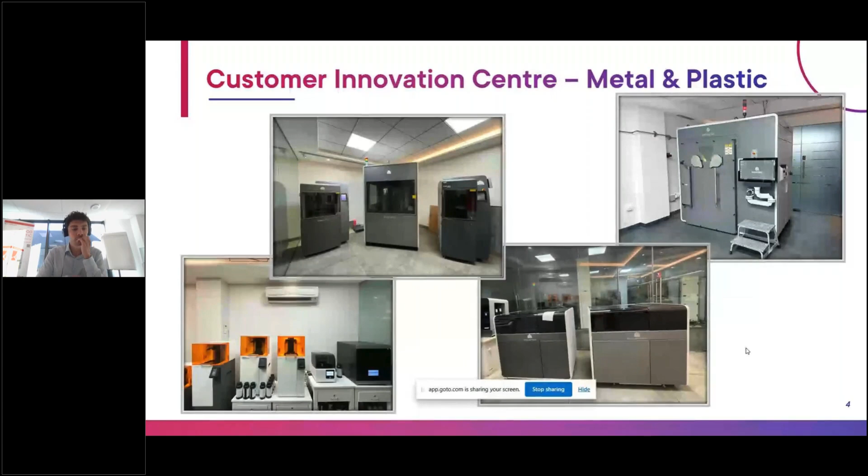So where we are today: we have installed more than 650 printers in India. We have 95 employees, dedicatedly 40 employees for application service as well. We have pan-India presence, with regional offices in Bangalore and Delhi. In Mumbai, we have our head office. Additionally, we have a customer innovation center for metal and plastics. These are some images where you can see all the material, all the machines under one roof.

Shree Rapid Technology is a digital manufacturing solution provider. For that, we deal with reverse engineering, and we tie up with GOM scanners. For reverse engineering software, we partner with 3D Systems, Materialise, and Oqton. For making metal powder, we partner with AMT. For 3D printing, we partner with 3D Ceram, 3D Systems, BMF, Rise 3D, and Nanofabrica. For inspection software, we partner with GOM.

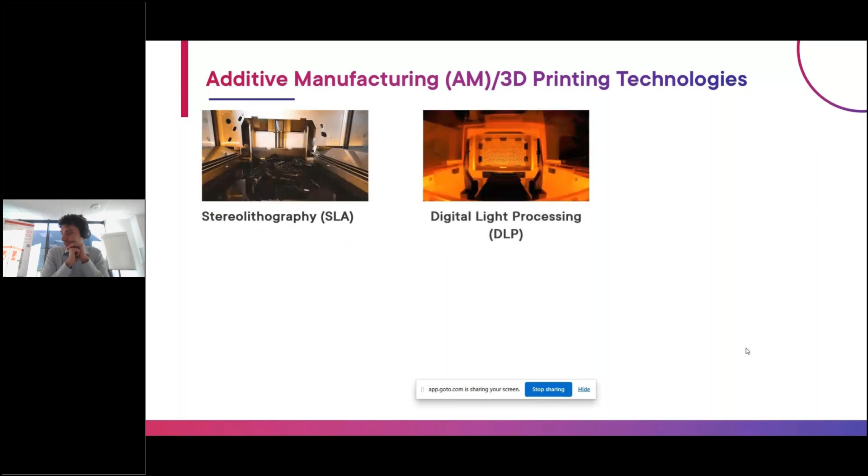Finally, we have dimensional post-processing techniques. So as a company, we have all the technology from right desktop to production level, like SLA technology, DLP technology, SLS technology, multi-jet printing, SAF based technology, and direct metal printing.

So what we're going to talk about today is something really passionate, in 3D printing. The company is called 3D Ceram, from Limoges, France. They have very rich experience in technical ceramics, and we have been following them for the last 6 years to propagate their technology and push adoption of additive manufacturing, especially in technical ceramics, across the country and industries.

So, thank you for our partnership with 3D Ceram. Thanks, Max. Please reach out to us for any queries to validate your technical queries in technical ceramics, or for any demonstration. Thank you so much.

So thanks again for the kind introduction. Very good morning to all the attendees of the webinar. During the next few minutes, I would like to give you a clearer understanding regarding our technology and full end-to-end solution for ceramic 3D printing.

First of all, let me explain the history of the company in order to set the context. The first cycle of the company started in 2001, and it was R&D. 3D Ceram is a spin-off of a technical center, and our co-CEO was head of this technical center.

We started to print and sell ceramic parts. It was our first business model. Then Richard Gaignon joined the company in 2009, and in 2015, nine years ago, we decided to change the business model in order to sell complete lines: machines, printers, consumables, and know-how to allow our customers to print parts in their own facility.

In 2017, the main shareholder became Sinto. Sinto is a Japanese group with revenue of more than $1 billion and more than 4,800 employees all around the world, and it gives stability to 3D Ceram. Since 2017, we've developed a range of machines, printers, and software that I will explain.

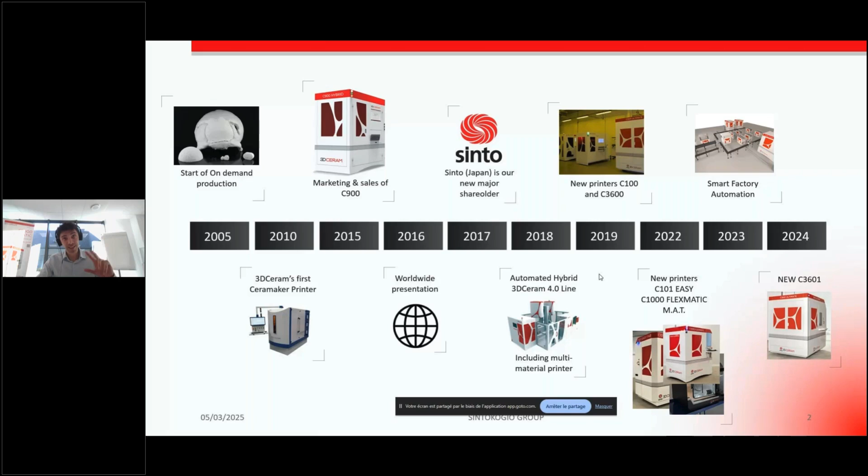To compile, we have more than 22 years of experience in ceramic additive manufacturing, and one of the strengths of 3D Ceram is that we started to print and sell ceramic parts ourselves—that was our first business model. A few numbers: we sold the first machine in December 2015, and we now have more than 140 printing lines around the world. Our headquarters is based in Limoges, a French city well known for ceramic in Europe, and 3D Ceram represents 60 people globally.

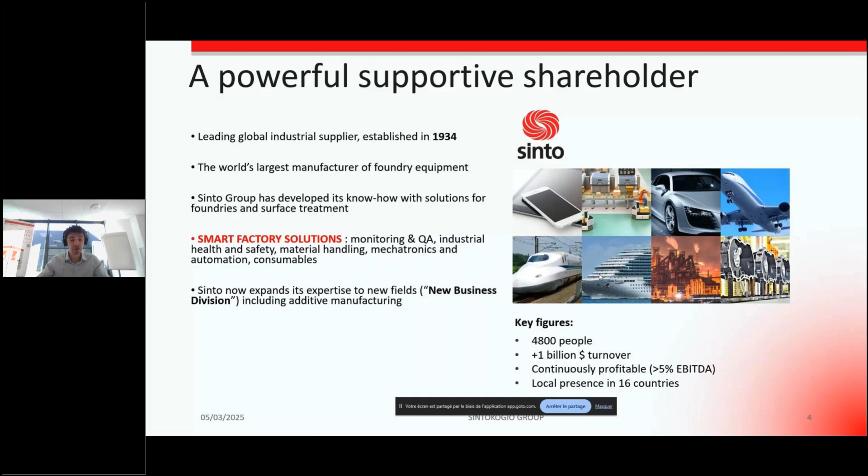As I told you, Sinto is the main shareholder since 2017. Sinto represents approximately 5,000 people, more than $1 billion in turnover, and Sinto is a very profitable company. The main and historical business of Sinto is not ceramic 3D printing—Sinto is a leader in foundry equipment and surface treatment. But Sinto decided to invest in 3D Ceram because they identified ceramic additive manufacturing as a growing business.

So, coming back to 3D Ceram and our business model: we are what I'm calling a process provider. What does that mean? It means we can assist our customer at each step of the process. We develop machines and printers that can be incorporated into semi-automatic printing lines, as well as software dedicated to ceramic 3D printing, always with the objective of increasing productivity and decreasing production costs.

The material, the consumable—I'll show you some video after—is a mix of ceramic powder and photosensitive organic content. And what we call services is technology transfer, which is very important for us. Technology transfer means training and assistance to allow our users to print a lot of good parts as quickly as possible.

A few words about the main process of 3D Ceram: SLA, stereolithography. The two first steps of the process are common to any additive manufacturing process. First, we have to create the CAD file of the part we want to print. Then the user has to generate the printing platform—meaning how many parts on the platform, printing orientation, and so on. Then the SLA machine, the printer, will print the ceramic parts layer by layer from the bottom to the top thanks to the slurry.

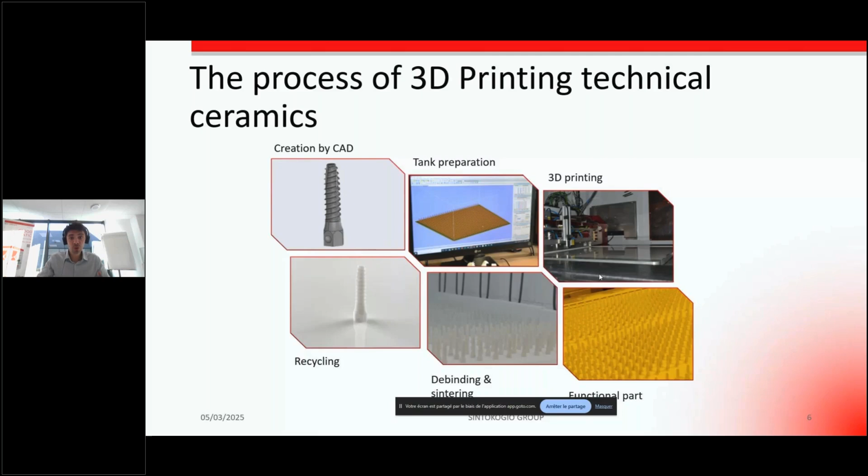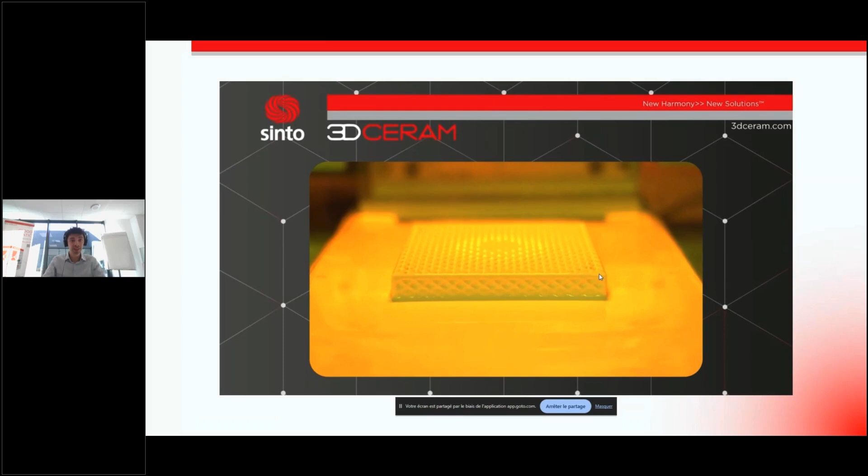Let me show you a quick video of the process. As I told you, the SLA stereolithography process uses a slurry, a mix of ceramic powder and photosensitive organic contents. The slurry can be high viscosity or low viscosity, depending really on the customer's need.

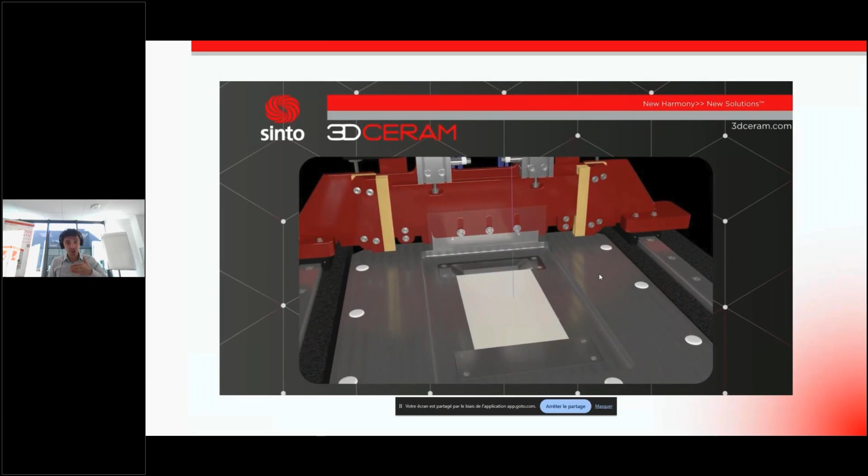This slurry will be printed by the SLA printer. The blade, the recoater system—exactly what you can see on the screen—will spread a thin layer of slurry on the printing platform, and the UV laser, based on the top of the machine, will cure the area to print.

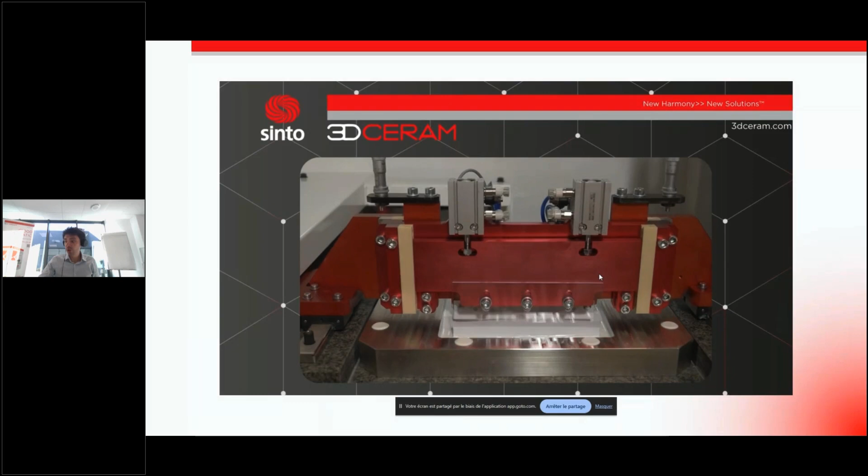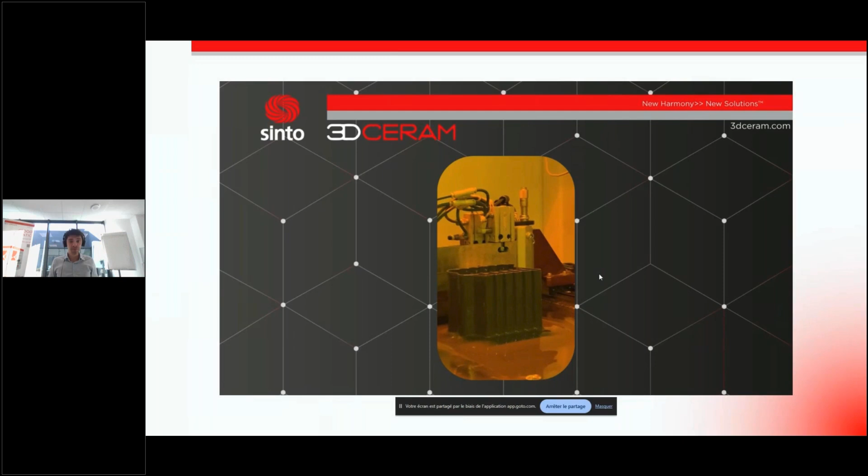After printing a layer, the printing platform will go down by a layer thickness, and the blade will spread another layer of slurry, and so on. When the printing of the part is over, we remove the printing platform from the machine.

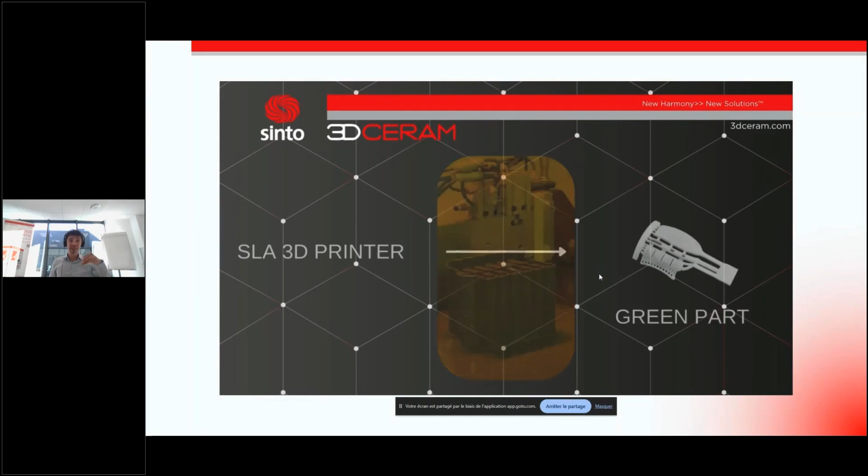We save the uncured slurry, the uncured material, which can be reused for the next printing run. At this stage, after printing and cleaning, we have what we call a green part, a mix of ceramic powder and cured photosensitive contents. So we have to do thermal treatments, debinding and sintering, to obtain a fully dense ceramic part.

So SLA is what we call a top-down process. Some strengths of the top-down process: we don't have any physical links between the part and the support, or between the part and the printing platform. Maybe some of you already know the DLP process - with SLA top-down, we don't have links between the part and the support. Also, top-down allows no limitation for the size of the printing platform.

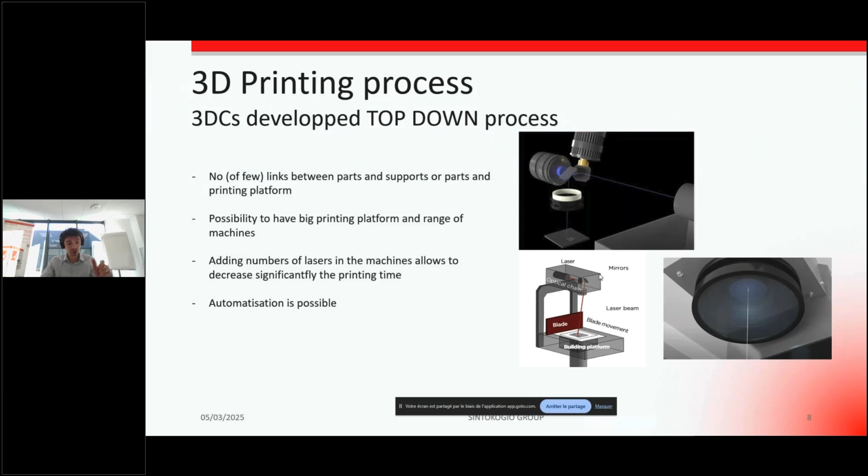And then we can have a range of machines that I will show you later on. On top of that, when we increase the size of the printing platform, we also increase the number of UV lasers in order to decrease the printing time. Definitively, top-down is the right process for mass production and to reach target part production, as we can have a big printing platform with automatization of the process.

As we're speaking about the machine, let me explain more in detail our range of printers. Thanks to SLA and the top-down process, we can offer a wide range of machines with the same process and the same slurry, to allow quick and easy scale-up for our customers.

We have the small one, the C101 Easy, with one UV laser inside, and a printing platform of 100 by 100 by 150 mm. We have the medium size machine, the C1000 Flexmatic, with a printing platform of 320 by 320 by 200 mm, and this machine can have 1, 2, or even 3 UV lasers in order to decrease the printing time.

And we have the bigger one for mass production or printing of big ceramic parts, the C3601 Ultimate, with a printing platform of 600 mm square by 300 mm for the Z-axis, and 4 UV lasers inside.

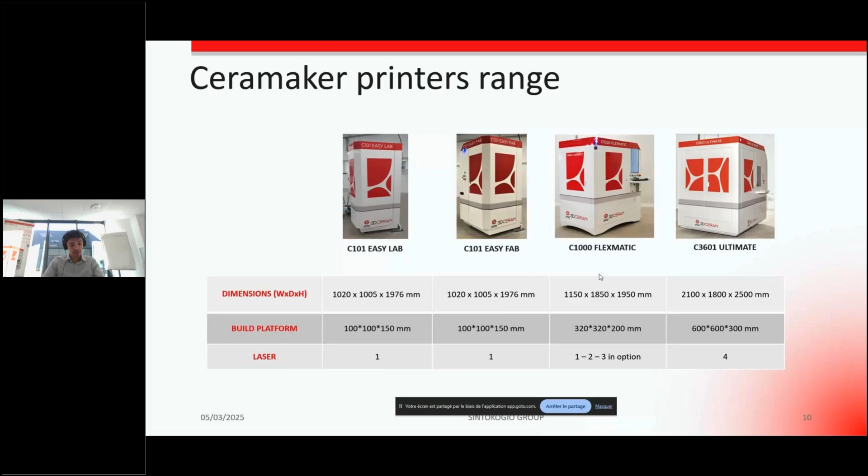Thanks to the range of machines and the big printing platform, our users can print big parts or lots of parts. Regarding lots of parts and mass production, additive manufacturing cannot yet compete with CIM, ceramic injection molding, for instance. But for series of thousands or tens of thousands of parts, 3D printing and SLA can compete.

For instance, if we look at the small alumina nozzle on this slide, this part is used in production for semiconductor applications. The size of the part is roughly 5 cm by 5 cm. We can print 4 parts on the small machine, with a printing time of 20 minutes per part. If you print the same part on the bigger machine, you can print more than 100 parts on the platform, and in this case the printing time per part is approximately 6 minutes per piece.

So once again, when we increase the size of the printing platform, we also increase the number of UV lasers inside, in order to decrease the printing time per part.

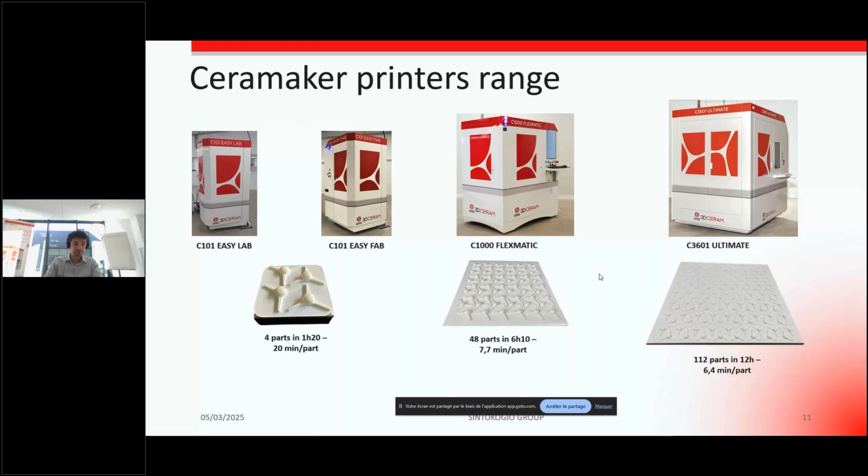Let me say a few words about the consumables - the mixture of ceramic powder and photosensitive organic contents. Our users have 3 options. First option, they can print the standard mixes developed and produced by us. Second option, we have an on-demand offer.

On-demand means that we have in our facility a team of chemistry and ceramic engineers in order to develop a new formulation with powder coming from the customer. So if you have your own ceramic powder and want to use 3D printing and SLA, we can develop an on-demand slurry for you.

And then the last option, very important mainly for laboratories, universities and research centers: keep in mind that all the machines are open systems. This means that any user or customer can develop by themselves their own formulation and their own printing parameters as well.

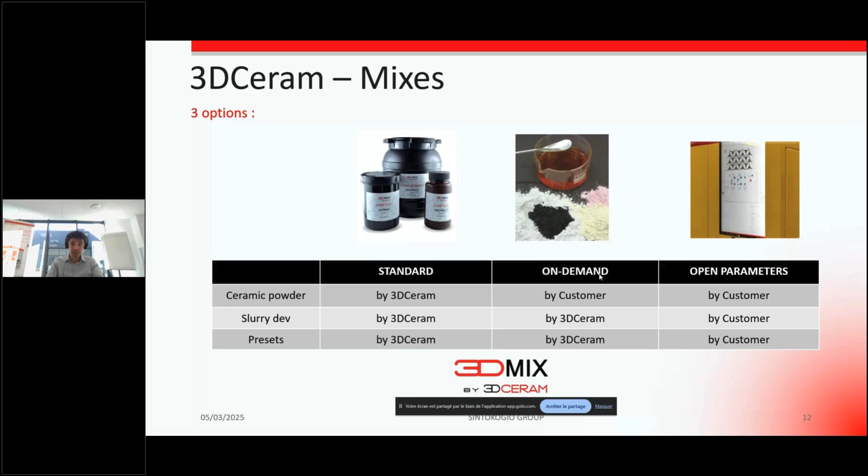About the standard mixes developed by us, just for your information, we developed more than 15 material mixes possible to print with our SLA printers. Mainly oxides, such as alumina, zirconia, HAP and TCP - hydroxyapatite and tricalcium phosphate for implants, cordierite for space applications, and others. We also developed some slurries for nitrides, such as silicon nitride and aluminum nitride, mainly used for defense and space applications as well.

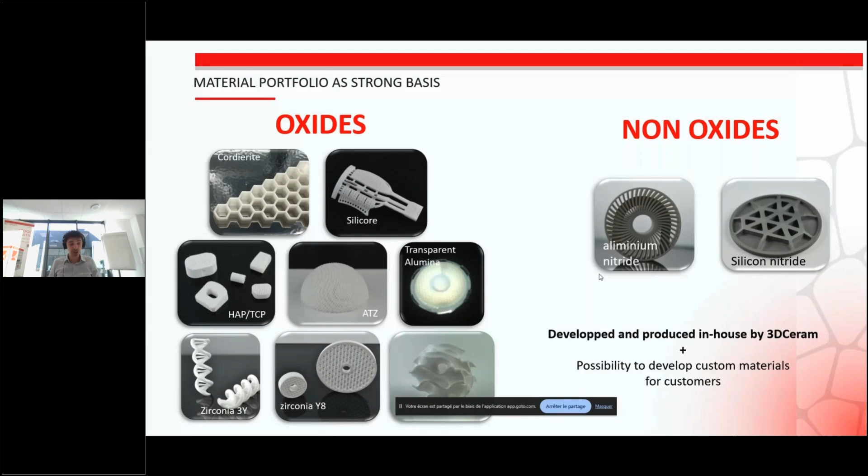But as I told you, all of our machines are open. So I want also to share with you some examples of material slurry developed not by 3DCeram, but developed by some of our customers using our machine. I have some customers, for instance, who developed formulations for spinel. Spinel is a transparent ceramic which can be used for luxury or defense applications. Alumina with short silicon carbide fibers, SiC, PZT, which is piezo, and ferrite.

So as you can see, ceramic is very broad. You have a lot of printable ceramics. We develop internally at 3DCeram the main printable ceramics, but as the machines are open, if you want to develop your own formulation, you can also develop your own slurry.

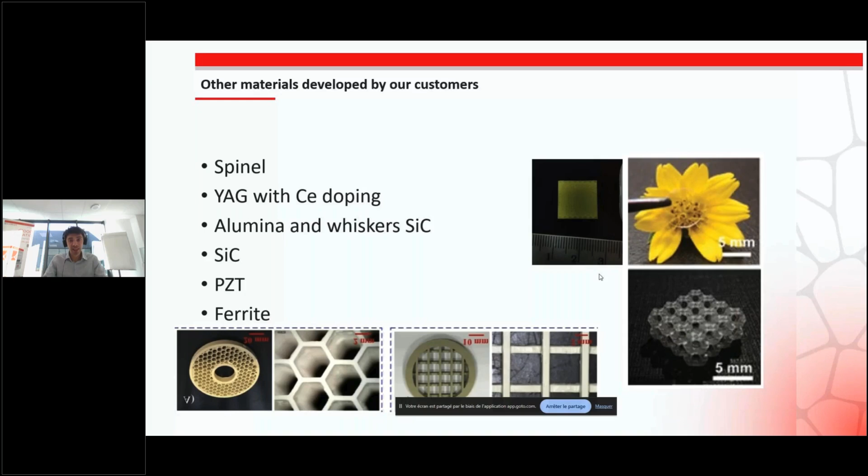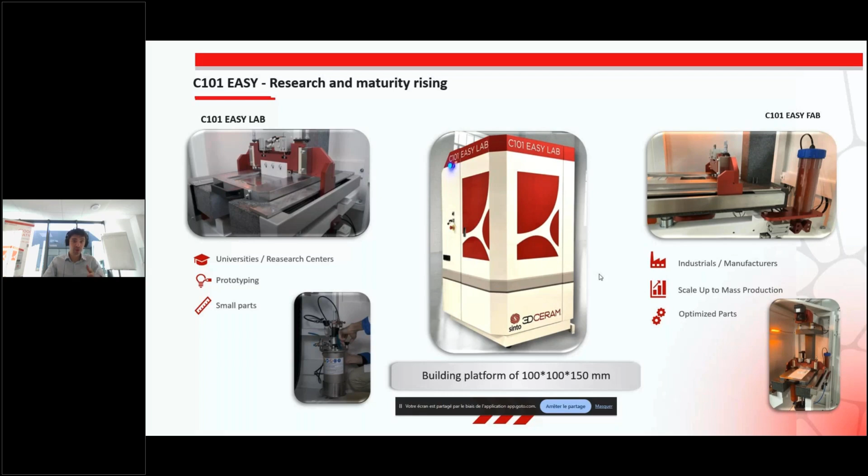Let me say a few words, just before showing you some applications, about the smaller SLA machine, the C101. This machine is mainly used by laboratories, universities, or also industrials for small series of parts, but mainly this machine is really designed for the development of new formulations. We have an option on this machine in order to start a printing run with only 15 milliliters of formulation. So this machine is mainly used by the industry, the research centers, people who want to develop their own slurry.

A few quick words about the medium-sized machine, the C1000 Flexmatic. This machine was really designed a few years ago with two targets in mind. Increase productivity. It is exactly what you can see on the right side of the slide. For instance, you can see 2000 orthodontic brackets printed on the 320 by 320 printing platform. Printing time for 2000 brackets is approx 8 hours. So for a company running 24 hours per day, it's possible to print 6,000 parts per day. So increase productivity and decrease production cost as well.

About decreasing the production cost, it is exactly what you can see on the left side of the slide. We did not develop only the machines, the printers, but also all the equipment for what happens after the printing. When the printing is over, the customer removes the printing platform, and we have this device with a tilt in order to automatically save the uncured slurry, which can be reused for the next printing run.

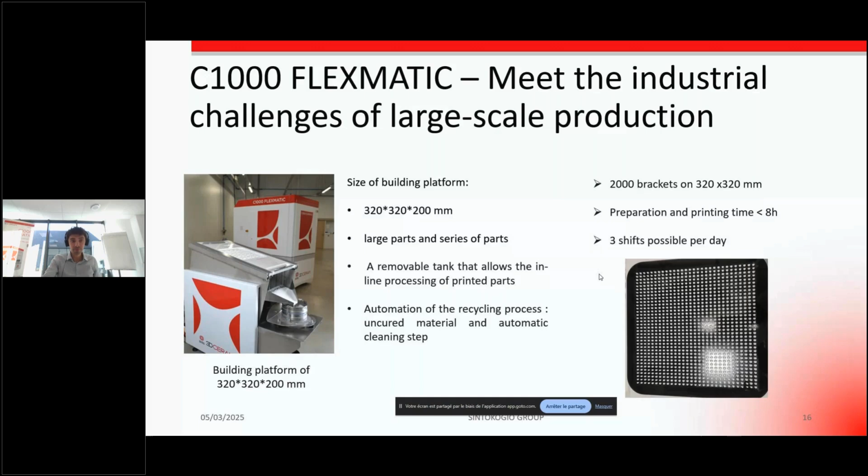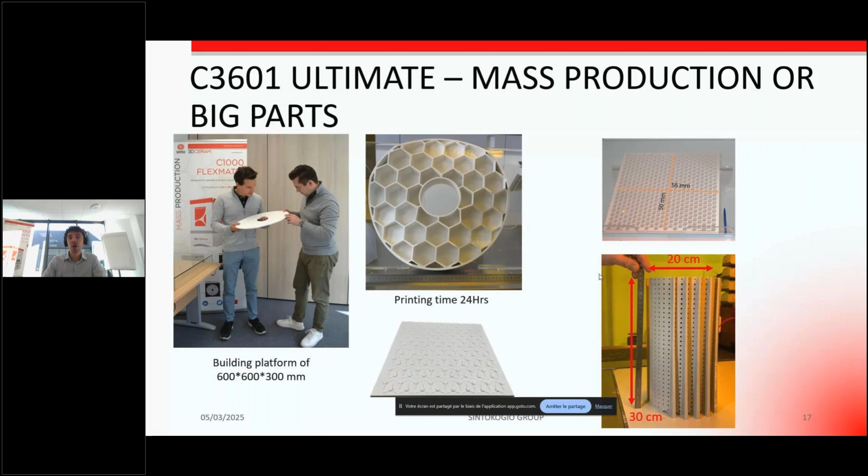And as I explained a few seconds ago, even bigger, the C3601 Ultimate, printing platform 600 by 600 by 300 mm for the Z-axis. This machine is mainly used for the printing of big ceramic parts. I will show you some applications just after. Here you can see some parts for space applications, mirrors for space applications, or some honeycomb for defense applications as well.

Just before speaking about some applications and study cases, I would like to say a few words about a very important development released a few months ago. For a few months, we have updated our machine with an artificial intelligence-based software. You know, for productivity, our customers are looking for 3 key points with additive manufacturing: reliability, repeatability, and cost efficiency. To do that, we developed a 2-step software.

The first one, before printing, is called CeriaSet. The aim of CeriaSet is to bring the 20 years of experience in ceramic 3D printing into one software in order to give advice to the customer and accelerate the learning curve. So it makes the process more reliable, as all the settings are managed by artificial intelligence.

Then, the second step of the software, CeriaLive, which is an artificial intelligence assisted regulation device. In fact, we added sensors in the machine, and according to the values and data of the sensors, there are some real-time adjustments of the machine parameters. CeriaLive brings repeatability to the process and cost effectiveness as well, as the sensors can accelerate printing speed if all is going well.

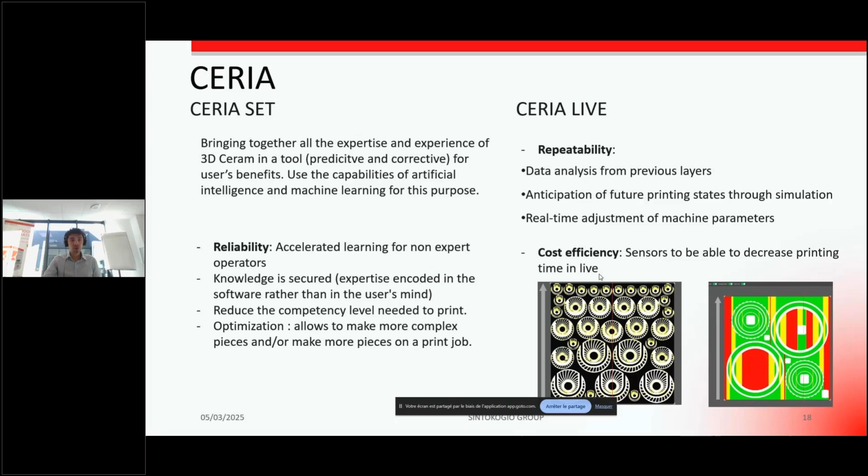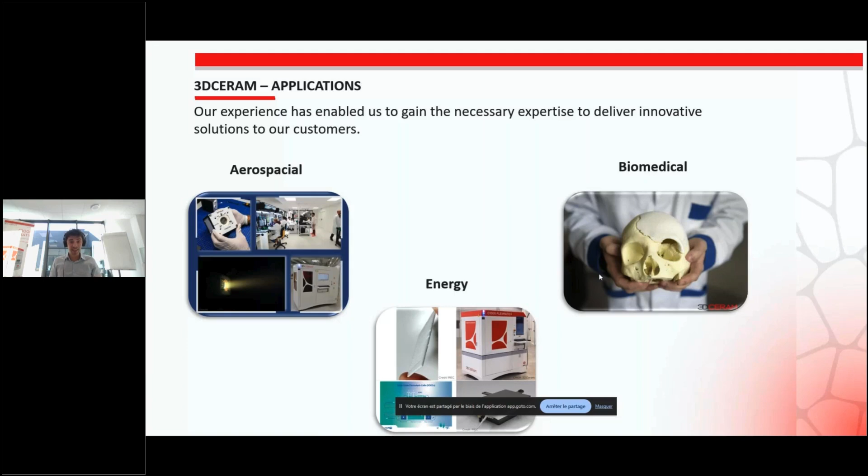So after this introduction about the company, the SLA process, and the machines, let me show you some applications which already adopted SLA and technical ceramic 3D printing. The first application that I want to show you: space and new space. New space is a big market for ceramic additive manufacturing because they need ceramic parts due to the environment, high temperature, cold temperature, mechanical properties, gamma rays, and so on. And they want to use 3D printing to decrease the weight of the part. If we can decrease the weight of a ceramic part, they can save fuel, which is very important for space.

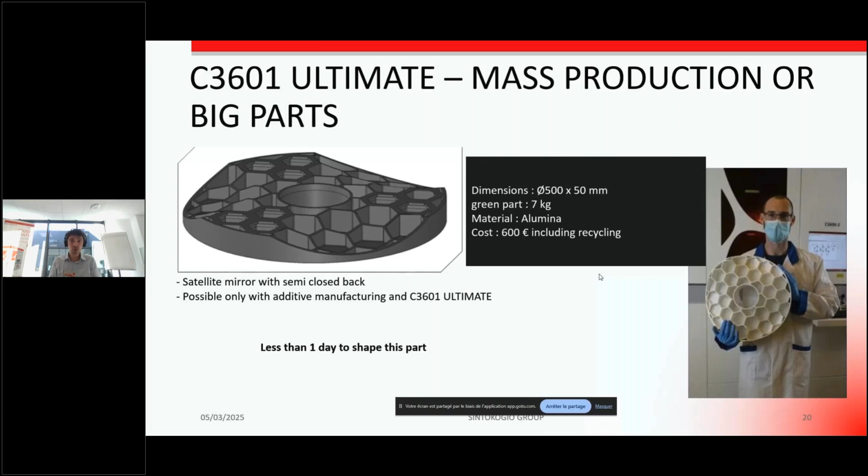The first example of a big part that you can see on this slide for space application is an alumina mirror for satellites. This alumina mirror with a semi-closed back design is only feasible with an additive manufacturing process. As you can see, the size of the part is quite big, 500 millimeters for the diameter of the part, and 50 millimeters for the height of the part. And we need 7 kg of slurry in order to print such a part. To give you an idea, the printing time of such a part is less than 1 day. It's 23 hours. Obviously, debinding and sintering still need to be done after, but at least you have a rough idea of the printing time.

Some optical mirrors are also printed with cordierite and silicon nitride. And it's really my pleasure today to show you this part, just freshly printed a few days ago on the medium-sized machine with silicon nitride slurry. Obviously, debinding and sintering still need to be done.

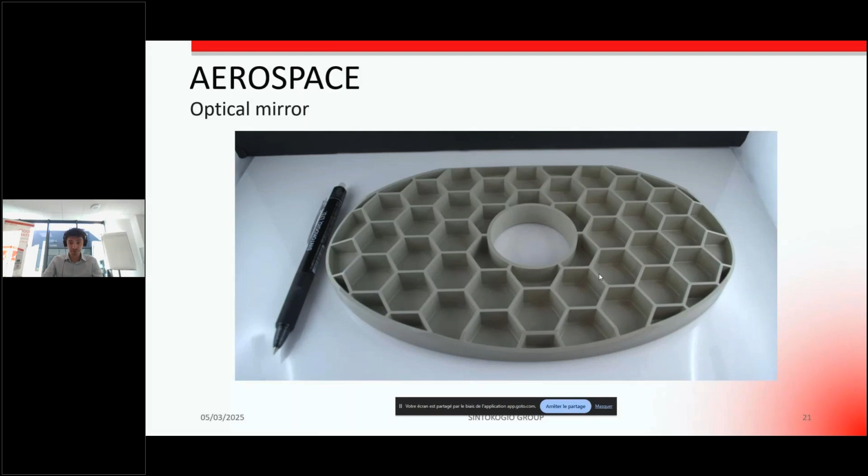These customers printing zirconia antennas already obtained the space certification a few months ago, so they already launched tens of parts into space. It's not a project anymore, it is a reality today to use ceramic printing for parts already in space.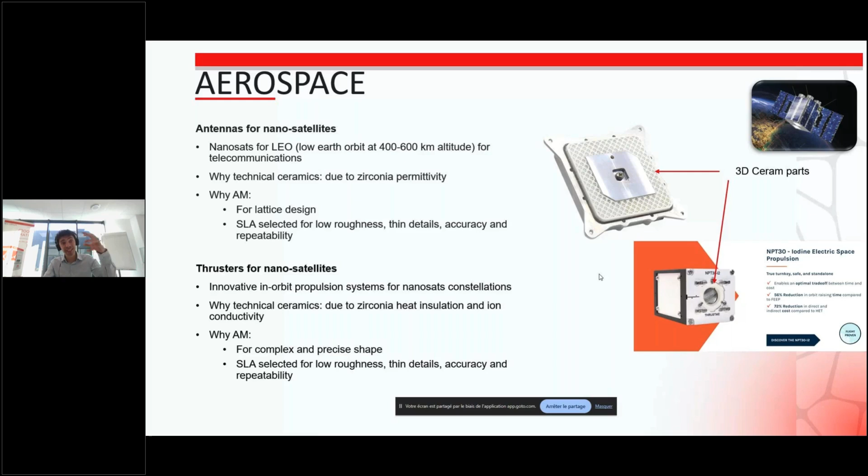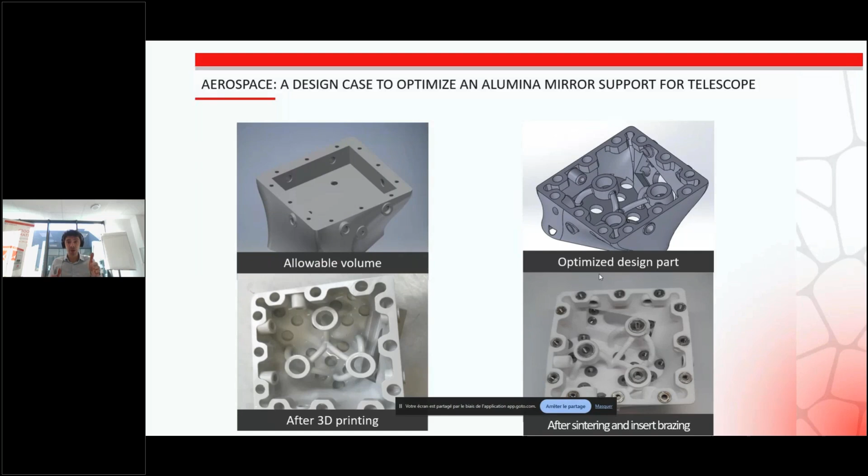Last example for space application, it is a mirror support for a telescope. As you can see on the first picture, this part was initially designed for metal printing, but metal properties were not okay for this application. So the customer had to switch to ceramic and alumina. So what we did, we started to redesign the part according to the rules for ceramic 3D printing. You can see a picture of the part after printing and the last one after sintering and the brazing of the metal insert. The size of the part is roughly 10 centimeters by 10 centimeters to give you an idea.

Second application that I want to share with you today is for semiconductors. About semiconductors, we are not printing the small chips, obviously. But in the machines to produce semiconductors, there are some big alumina parts. These parts have been made with conventional processes for years. And now users want to use 3D printing to produce the parts locally and to decrease the production cost.

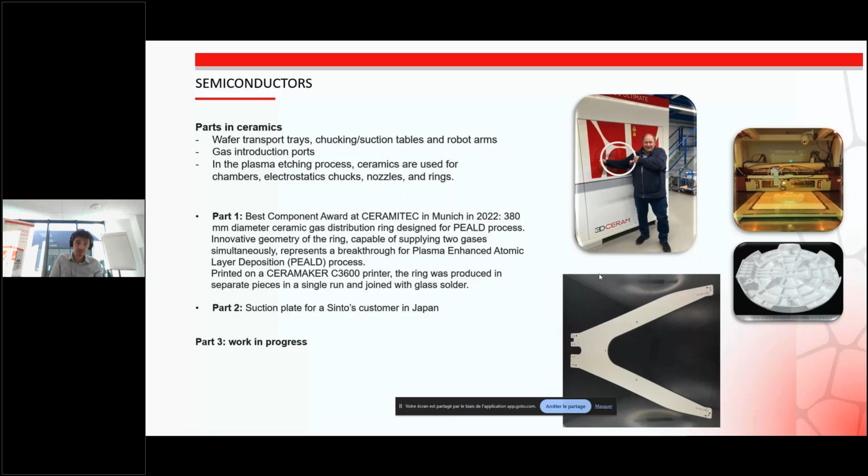On this slide, for instance, you can see some examples of parts such as a suction plate for silicon wafers, a ceramic gas distribution ring, and a robot end effector arm. All these parts are big alumina parts printed by the SLA process and already used in the machines to produce semiconductors.

Another application which adopted ceramic printing years ago is biomedical implants. A few examples of implants on this slide. We already printed some skull implants, some face implants as well, and some bone substitutes. Most of the implants are printed with HAP, hydroxyapatite, or TCP, tricalcium phosphate.

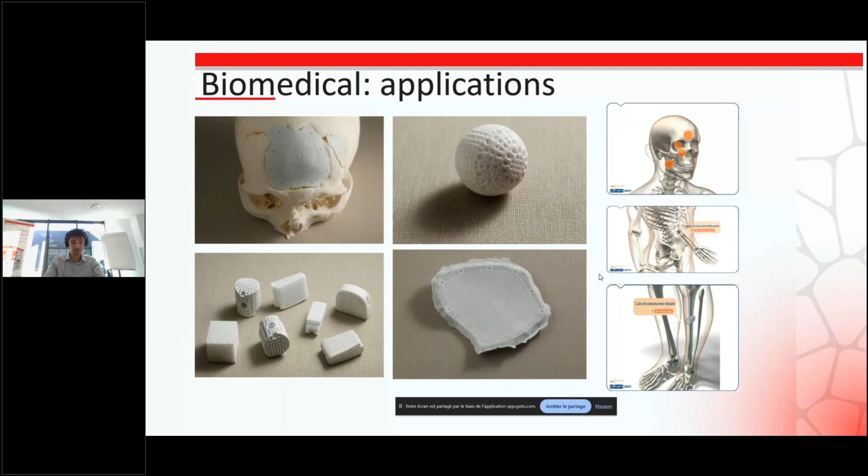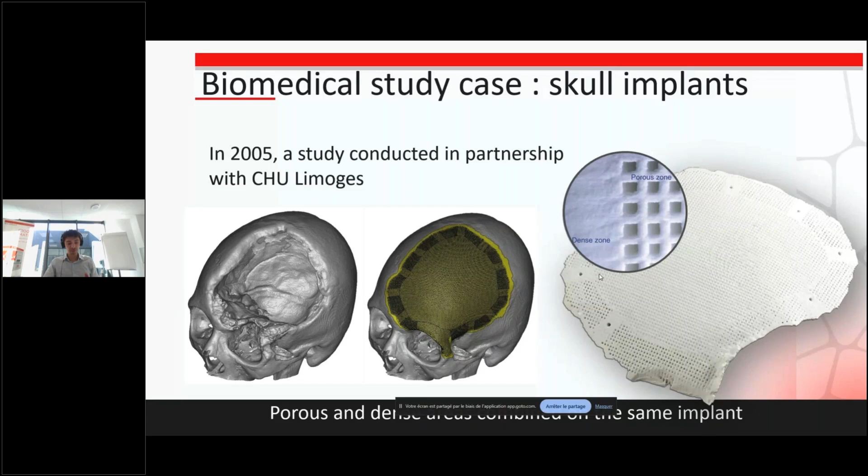So first, let me show you in more detail what we did for the skull implants. First, the advantage of 3D printing is obvious, because nobody has the same defects. But as you can see on the slide, on the same part, we have 3 different functions. We have the dense area in the middle for the mechanical properties. We have the porous area on the border of the part to allow the osteointegration of the implant. And we have some big holes all around the implant in order to allow the surgeon to put resorbable sutures to fix the implant to the skull.

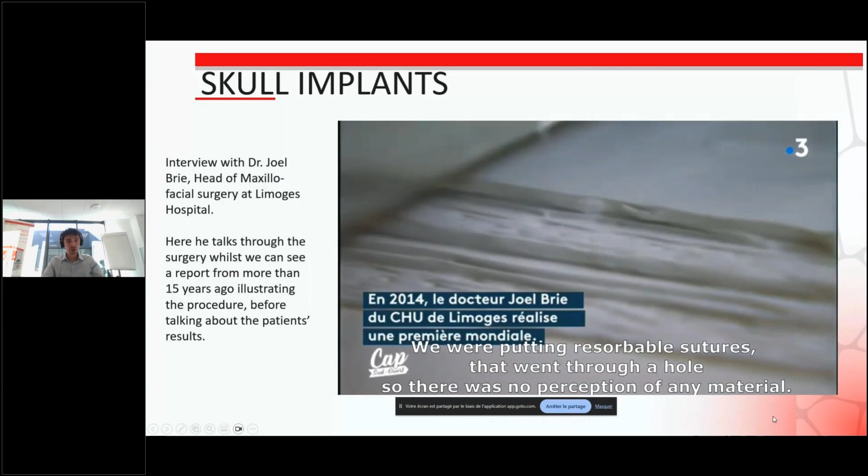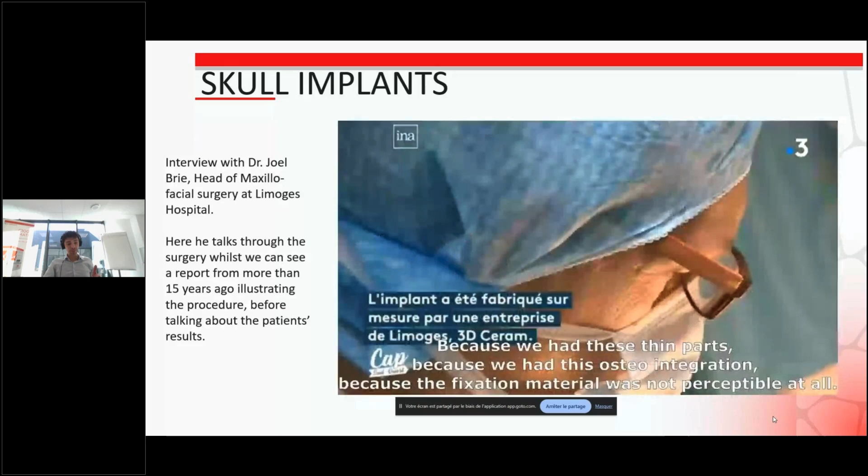So you can see in this video how the surgeon, in this case Dr. Brie, head of maxillofacial surgery at Limoges Hospital in France, puts in resorbable sutures. And Dr. Brie explained as well that we have a perfect continuum between bone and implant with the SLA process. This is why for the past few years, we have more and more hospital surgeons who prefer to use ceramic and HAP implants instead of titanium implants or PEEK implants.

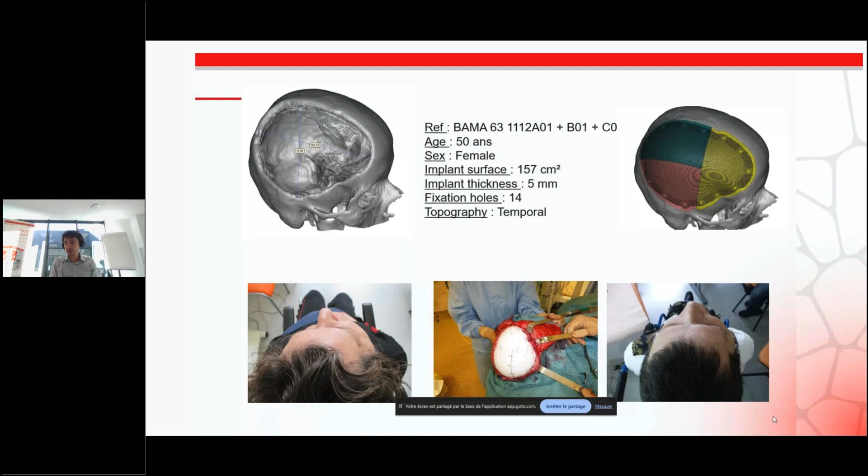Let me show you, for instance, this example. So same thing. It's not a project, as you can see, to use ceramic printing for implants. We already obtained the clinical certification more than 10 years ago in France, and we printed more than 50 skull implants for real human patients.

So before being able to print any skull implants, we had to do the clinical case. And the main focus of the clinical case was to prove the osteointegration of the implants. And it is exactly what you can see on the CT scan. On the first CT scan, you can see the CT scan 1 month after the surgery. So you can see that we have some gap between the implants and the skull.

And you can see the same CT scan 1 year, 12 months after. We don't have any gap because the osteointegration of the implant is perfect, which means the real skull thinks that the implant is bone and it will create a physical link. So you have a perfect osteointegration of the implants. You have total biocompatibility and you don't have any risk of rejection of the implants.

This was the conclusion of the clinical case, and this is why, as I explained a few seconds ago, more and more hospitals, surgeons, people prefer ceramic implants instead of metal or PEEK implants.

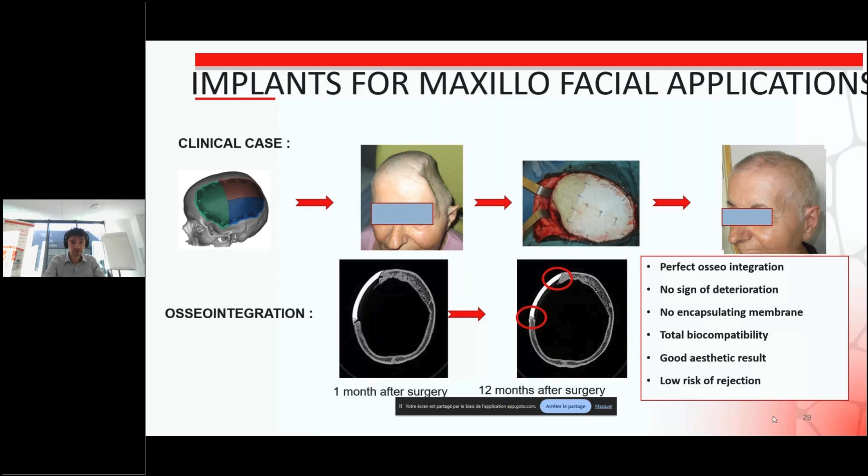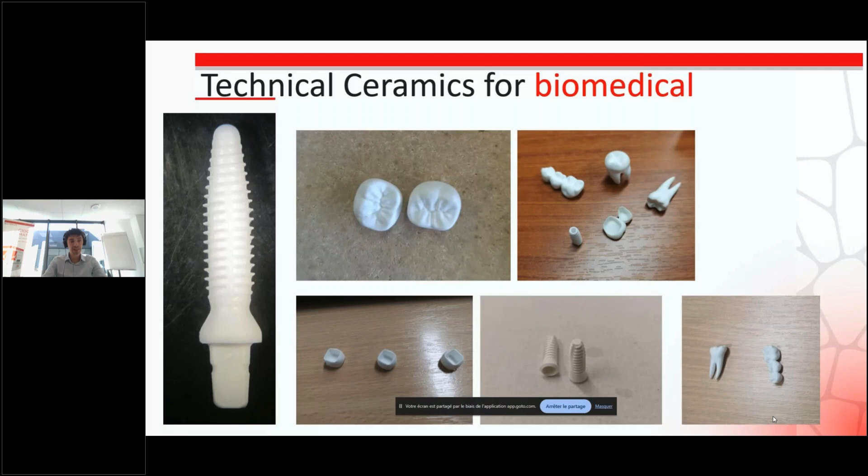Another application for biomedical implants is dental application. With SLA and 3D printing, we can mainly print zirconia screws, for instance, or zirconia crowns, as you can see on this slide. These parts can also be done with other ceramic processes, but with 3D printing, it's possible to decrease the lead time and to decrease the production cost as well. And as you can see on the left side for the screw, thanks to the SLA process, we can obtain very accurate parts with a good definition for the threads.

So another application that I want to share with you today, which already uses SLA stereolithography for mass production, is hydrogen production. Hydrogen is becoming more and more important for the industry, the cars, the planes, and so on. But how do we make hydrogen? Normally, we make hydrogen by cracking CH4 or with steam. So using SOEC, solid oxide electrolysis cells, you can create pressurized hydrogen that you can use for the industry.

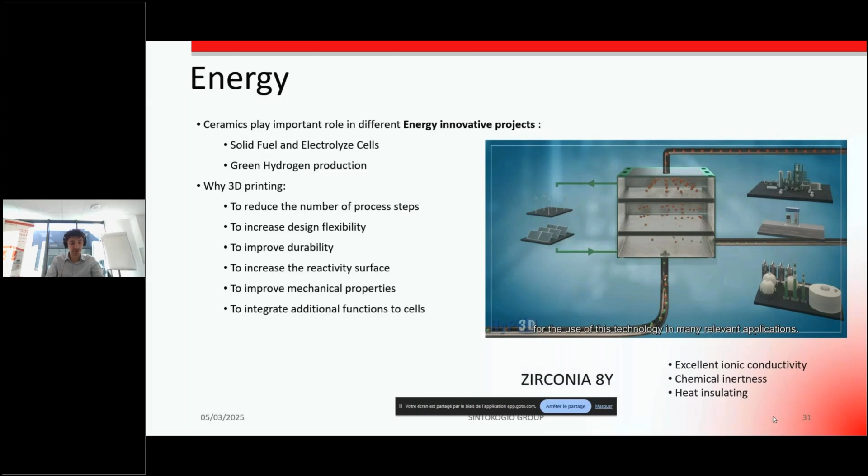So the question is why 3D printing and SLA is interesting for them. They are printing the cell. The white part is a cell, and the cell is between 2 metal interconnects. And in the complete device, you have a succession of cells and interconnects. The exchange is made on the corrugated surface. The corrugated surface increases the reactivity and the mechanical properties of the part.

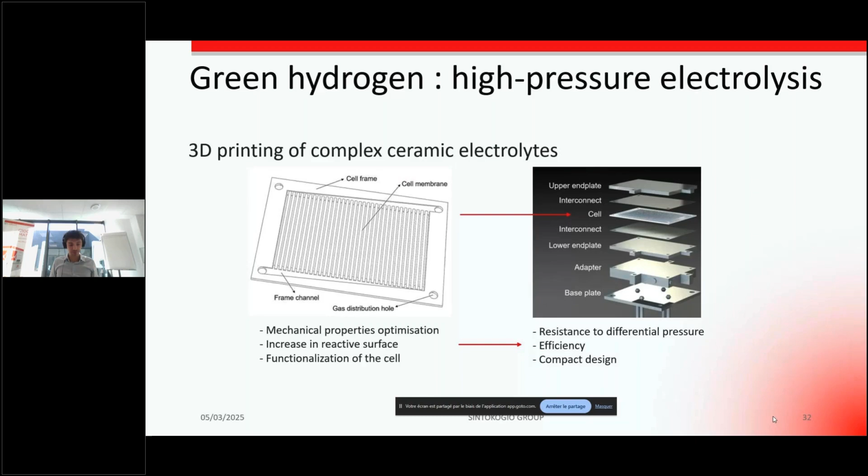You can only make this design with SLA, and the material is zirconia with 8% yttrium, so it is a well-known material. And for this application, we are speaking about huge needs in terms of parts, hundreds of parts per day. So on the medium-sized machine, we can print, for instance, 6 parts in 8 hours.

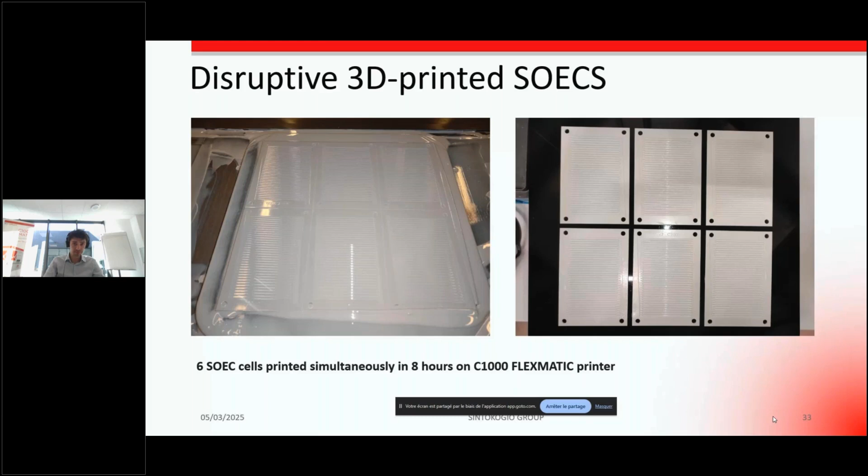So, you know, one of the most critical points for the democratization of 3D printing is to be cost-effective. And for this application, even with our bigger machine, it was not possible to reach the production cost. For the technical points, no problem, but it was not possible to cut the cost.

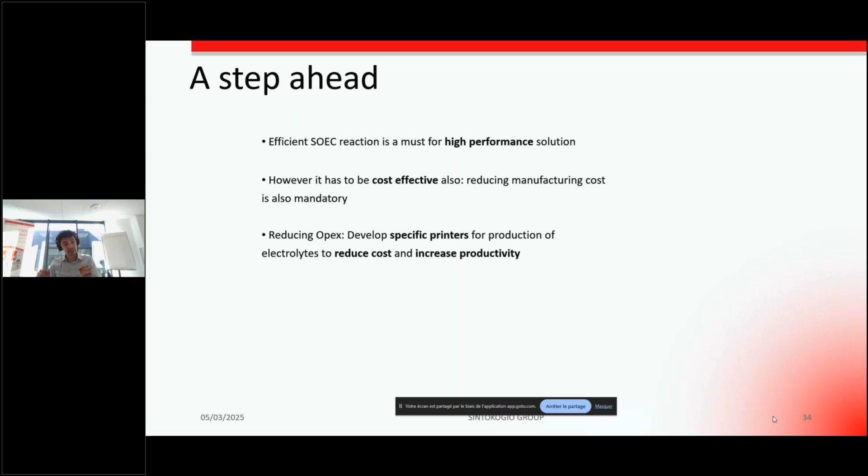This is why, in order to decrease the OPEX, we developed a specific machine with 2 goals in mind: increase productivity, more parts, and decrease printing time at the same time, and cut the cost with automation and no downtime. So to do that, and I will show you a video just after, we developed a machine with 2 printing platforms inside in order to print approximately 20 cells at the same time.

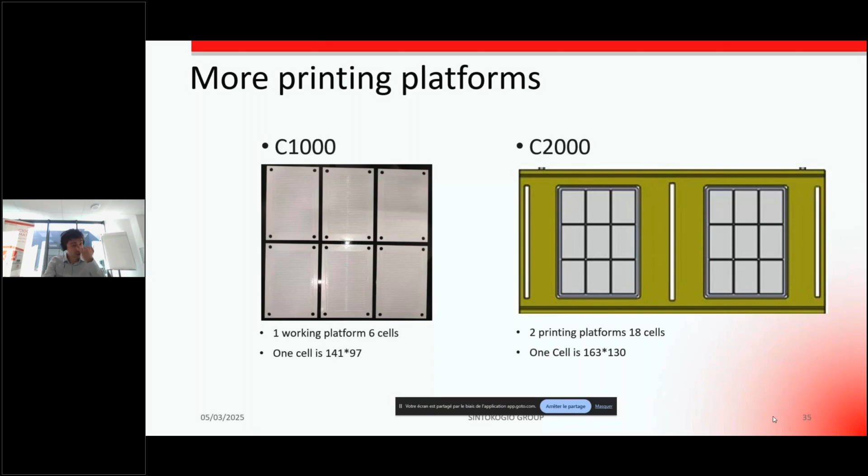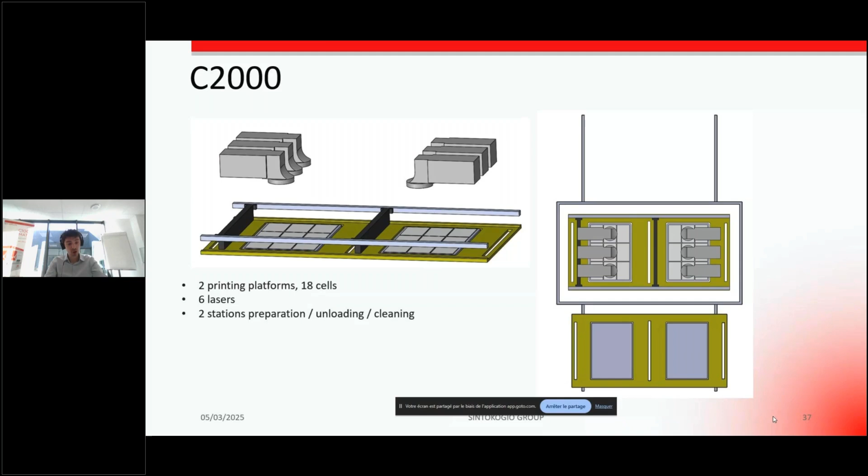Not 1, 2, or even 3, but 6 UV lasers inside. 6 UV lasers in the same ceramic 3D printer to decrease the printing time. And in order to decrease the downtime, which is the time between 2 printing runs, 2 stations for loading and unloading of the printing platform.

I will show you a video after, but when the printing run is over, the 2 printing platforms with printed parts go out of the machine into a station for cleaning. You have a tilt, and all the uncured slurry will automatically be recycled for the next printing run.

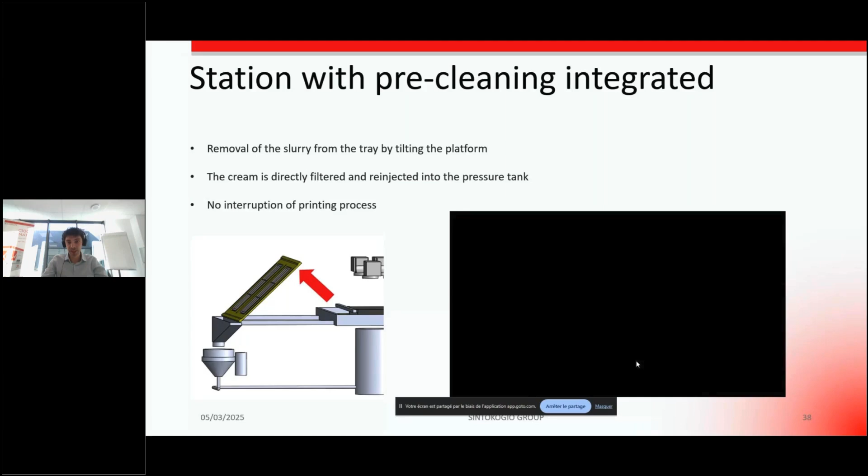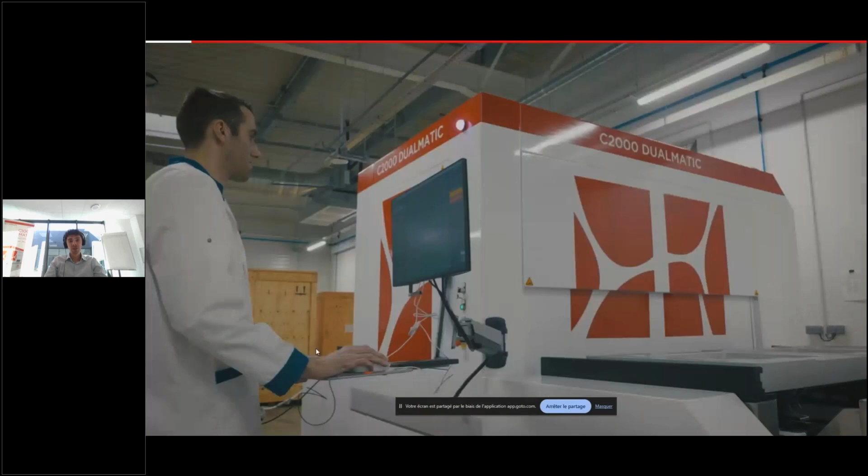Let me show you a video of this new machine just installed a few days ago on the customer site. This machine is ready made for the automatization of the process. You just need people in order to start the printing run, and after that everything is done automatically.

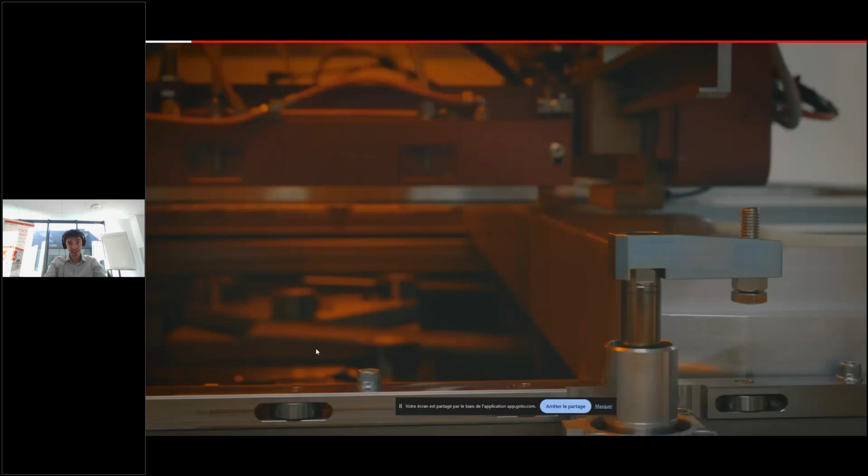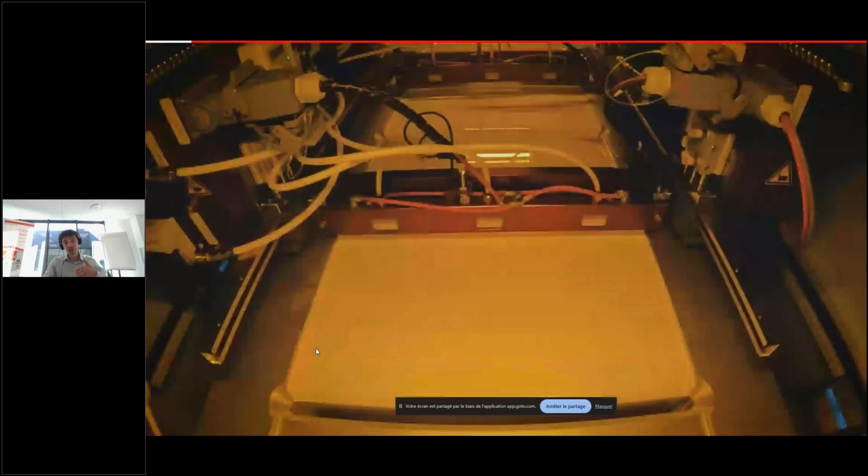As you can see, the two printing platforms will automatically go inside. You have the slurry—in this case, as we are printing a zirconia cell, the slurry for zirconia with 8% of yttrium. We have the two printing platforms with the two recoater systems, and a total of three plus three, six UV lasers on top, in order to decrease as much as possible the printing time.

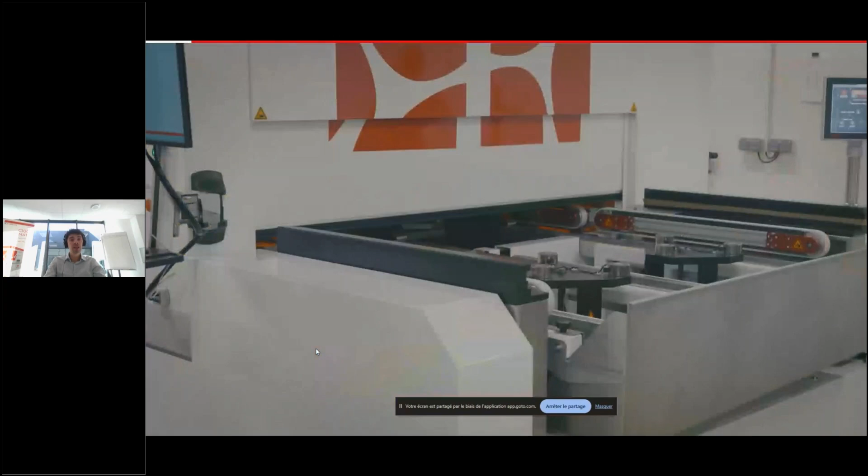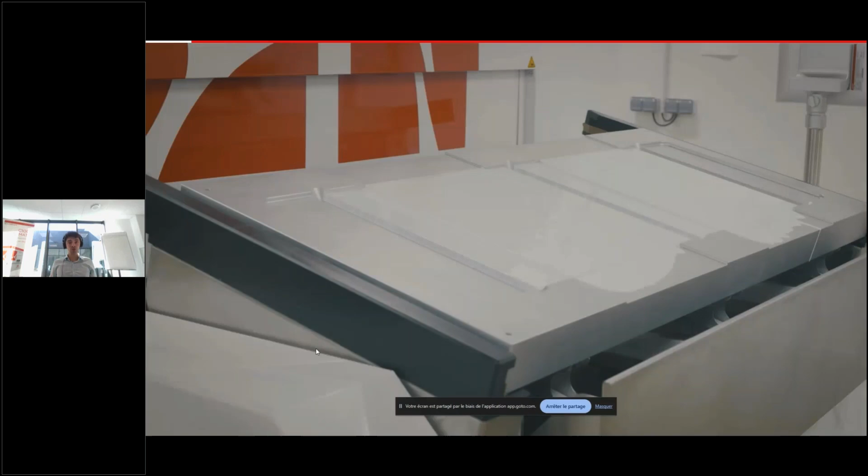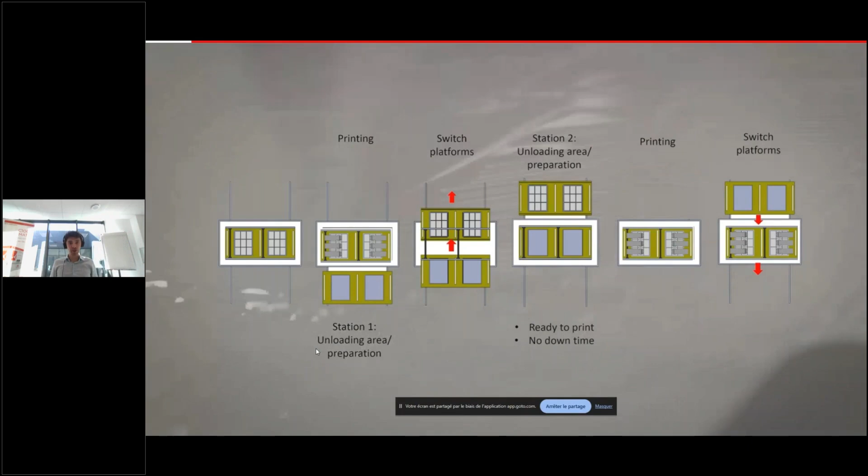After, automatically the printing platform goes out in the unloading system. You have the tilt device in order to save the low viscosity uncured slurry, which will be automatically reused for the next printing run. And at the same time, you have a new clean printing platform that you will see in just a few seconds, which will automatically go inside.

A few months ago, you needed people to remove the printing platform and start a new one. With this machine, we have almost no downtime, so no waste of time between two printing runs.

This machine is already installed in a few days at the customer site, and he will start to use the machine. As you understood, the aim of the machine is really to increase productivity and decrease production cost.

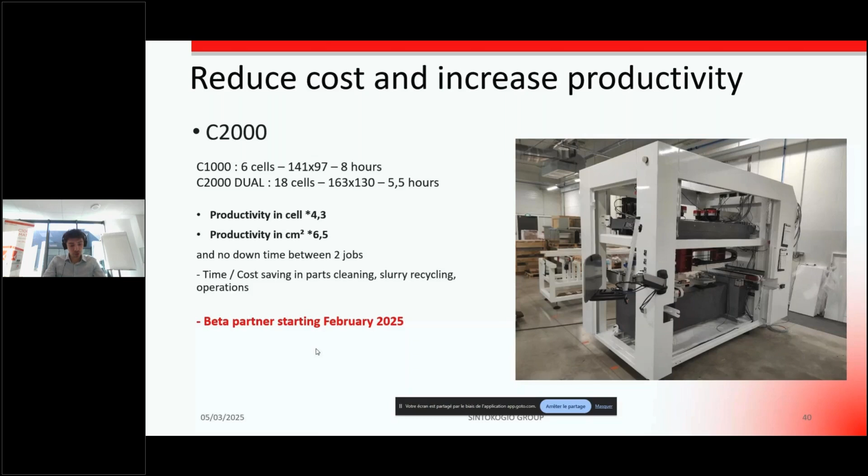Zirconia can be white, can be black. You can add enamels on the zirconia to add some glossy and shiny color. And if we do post-treatments, you can have the glossy and shiny aspects.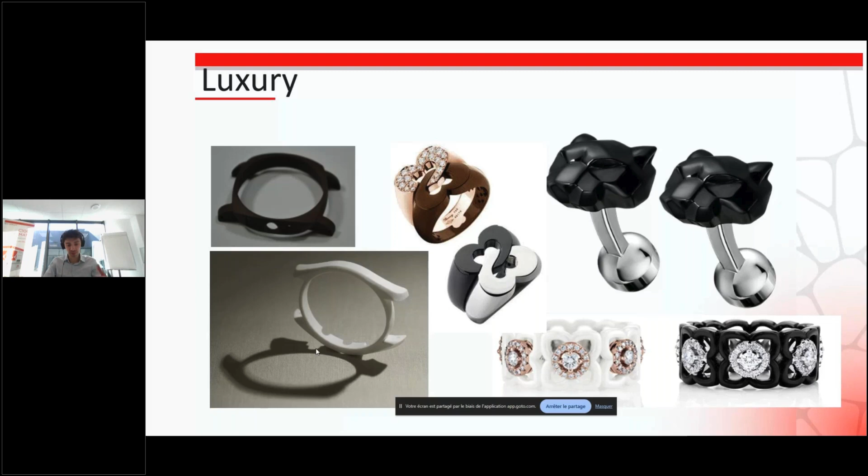So here you can see some cufflinks, some rings, some watch cases, and so on. And obviously, one of the main advantages of 3D printing for luxury applications is the freedom of design—you can shape new designs that can only be shaped and printed with additive manufacturing and the SLA process.

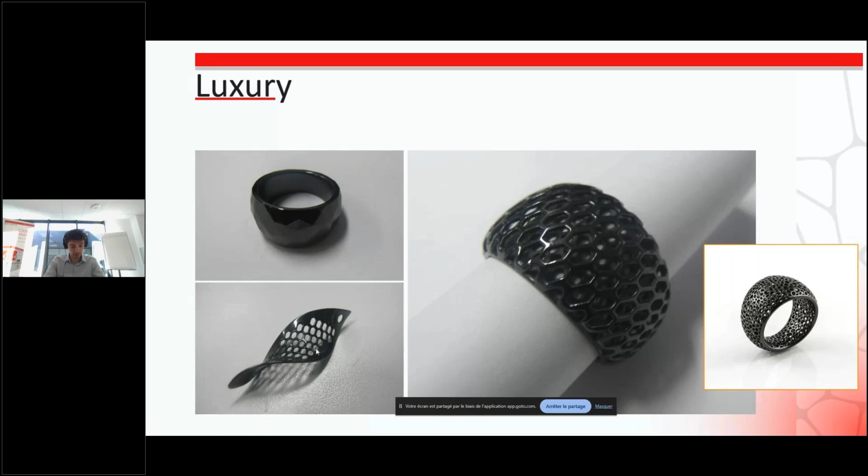Now I would like to say a few words about another machine and another process. During the first minutes I spoke about SLA process, machines, applications and so on. Now I will still speak about ceramic 3D printing, but another machine and another process.

A few years ago, we launched on the market an extrusion-based machine, the MAT, multi-additive technology. This machine, mainly for laboratories, universities, and research centers, is based on extrusion processes and can integrate different technologies.

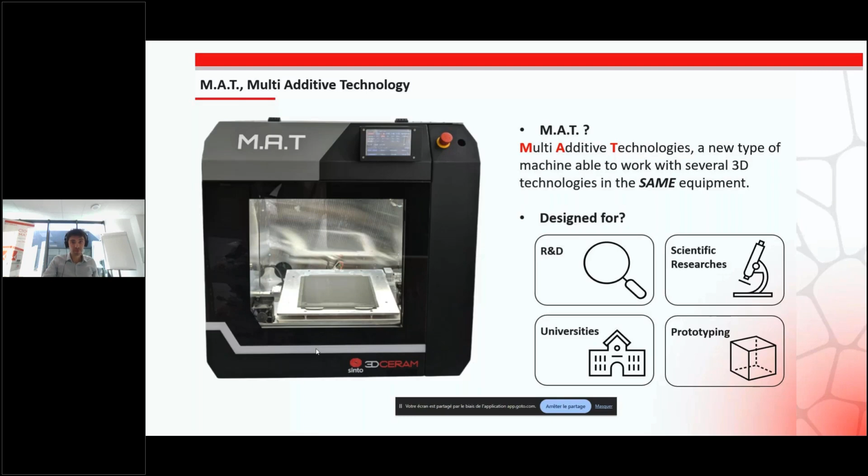The MAT can use an FFF head, so a filament goes through a nozzle and you can print parts. Or a direct ink writing head, which is a paste extrusion system. Or direct pellet extrusion, where the material is not a filament, not a paste, it is the same pellet used for ceramic injection molding, for instance.

And on top of that, the machine can use a CNC head to do machining to improve the surface aspect of the parts after printing.

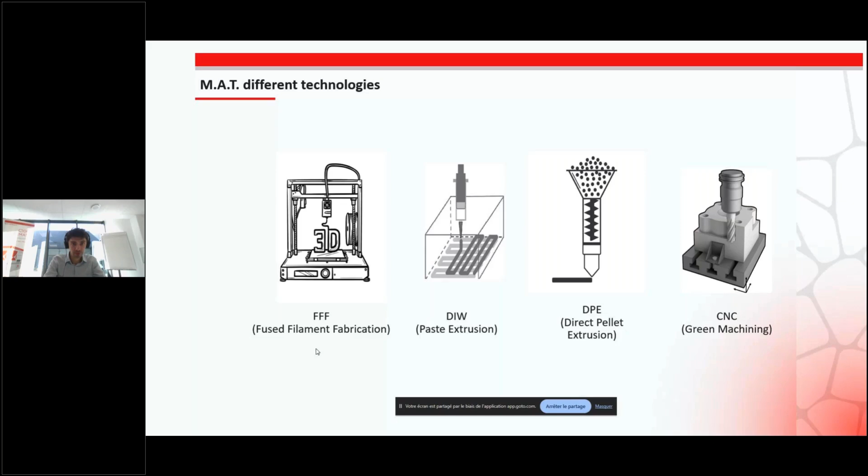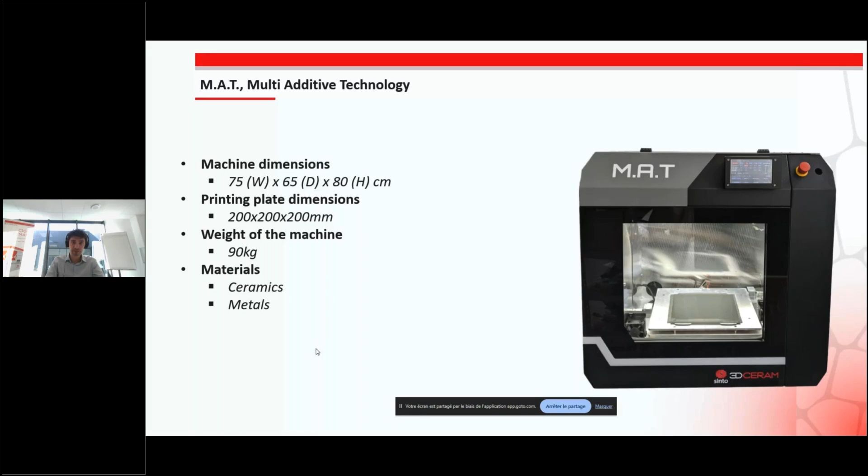So this machine can integrate different heads, has a printing platform of 200 by 200 by 200 millimeters, and can print ceramic filaments, metal filaments, ceramic pellets, or metal pellets. Even if ceramic is the main know-how at 3D Ceram, keep in mind that this machine can print both ceramic and metal.

So here, for instance, about FFF: FFF is a well-known process. Probably most of you already use the FFF process for plastic printing—a filament goes through a nozzle. It is exactly the same thing with ceramic filaments. If you don't know, keep in mind that it is possible to print ceramic parts with the FFF process.

For instance, on the video you can see a zirconia part during the printing process, and on the picture you can see zirconia, alumina, and the black and gray parts are SiC, silicon carbide.

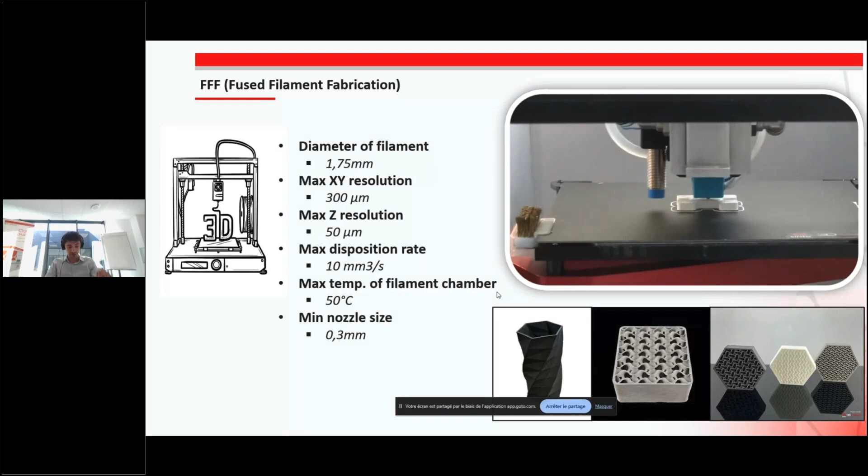Another process for the MAT is paste extrusion. If your material is a paste, most of the time a mix of ceramic powder and water, it is possible to use direct ink writing to print parts. So it's not a filament, it's a paste, and the process is direct ink writing.

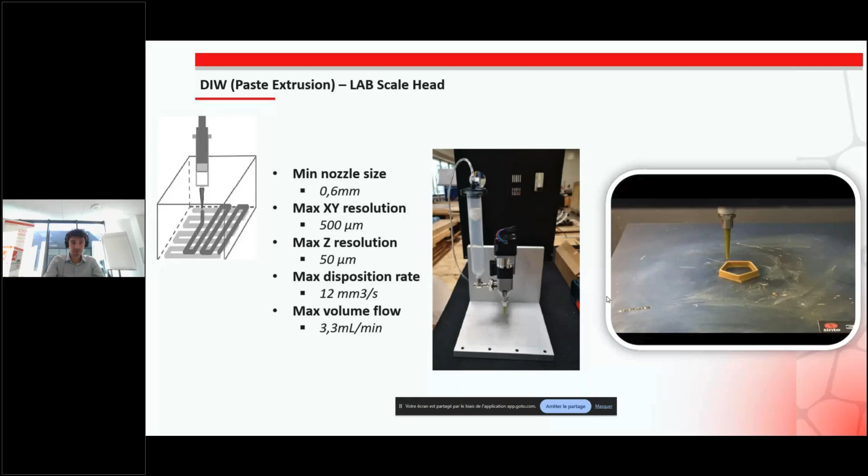Another process is direct pellet extrusion. The material is not a filament, not a paste, it is a pellet—the same pellet already used for the ceramic injection molding process—and it's possible to print parts with a direct pellet extrusion head. One of the main advantages of this process is that it's very fast, a very quick process.

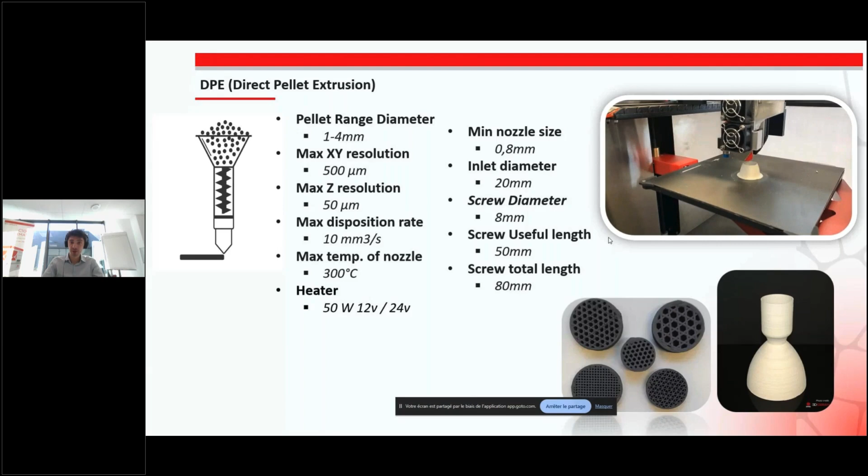For instance, in order to print this part with direct pellet extrusion—quite a big part, you can see the size is 110 by 110 by 150 mm—the printing time is 45 minutes.

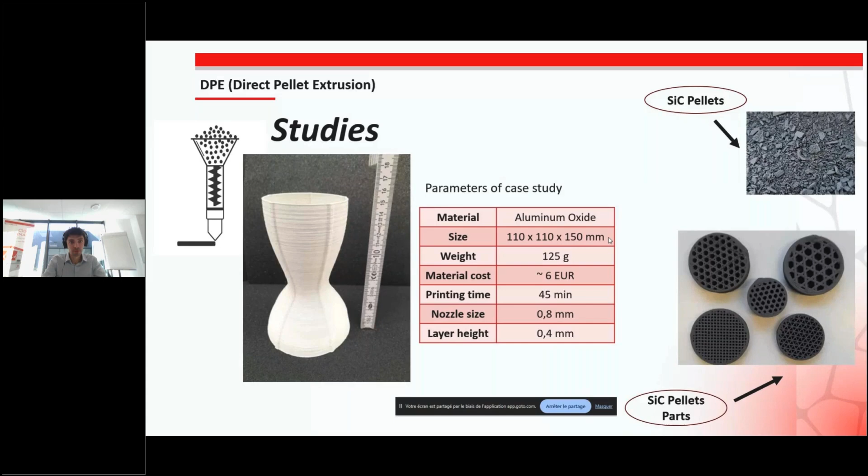As I told you a few minutes ago, one of the strengths of this machine is the possibility to combine printing and green machining on the same printer. So if you want to improve the surface aspect of the part, it's possible to print and machine at the same time. You can have two heads on the printer: one for printing, which could be FFF or pellet extrusion, and another for machining the part. It's very useful if you want to improve the surface aspect or the accuracy of the part, for instance.

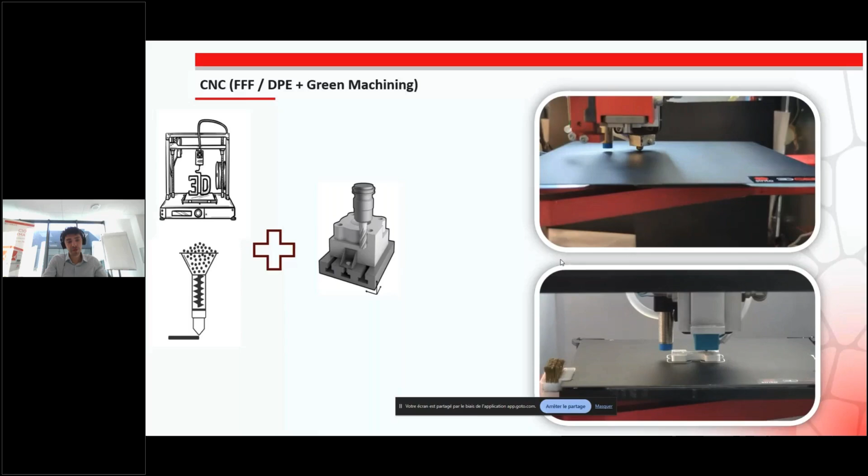About SLA, and this is really the vision of 3D-Ceram, we believe automatization is mandatory to cut down the price. Every time we touch a part, it costs money. That's the first thing. Second point is machine learning, artificial intelligence. As I told you, 3D-Ceram is part of Sinto Group, and Sinto is quite good at automatization. That's what we need to do.

Whatever your need for machine, technology transfer, or parts, we are here with Shree Rapid Technology to assist you in implementing additive manufacturing in your current business.